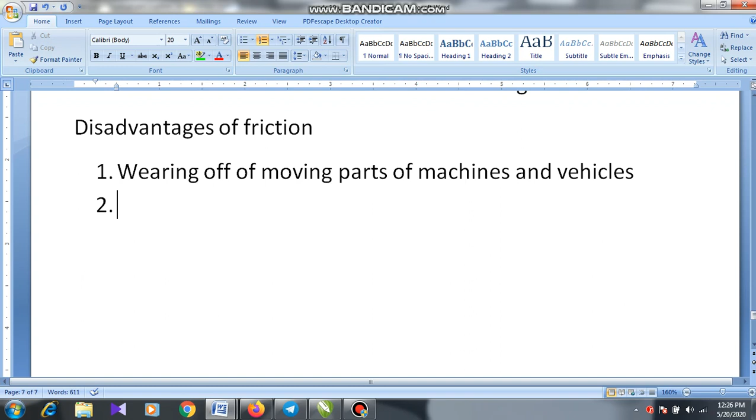Second, when there is friction occurring in a machine, it will consume more energy than when there is less friction. For example, in a motorcycle there is a chain. If you oil it, it will have less friction; if you don't oil it, it will have more friction. In that case, when you drive that bike, you have to spend more petrol. So wearing off is one side and energy wastage is another.

Energy wastage will also create economical losses. At the same time, during friction, heat will be generated, and that heat can damage the machine. That's another problem. Sound will also be generated, lots of sound. You have seen in some places when vehicles make brakes, it creates a bigger sound. Why? Greater friction. So sound generation creates disturbances. So, wearing off of moving parts, energy wastage, heat generation that can damage the machine, and sound generation that creates disturbances - these make a person think about how to reduce friction.

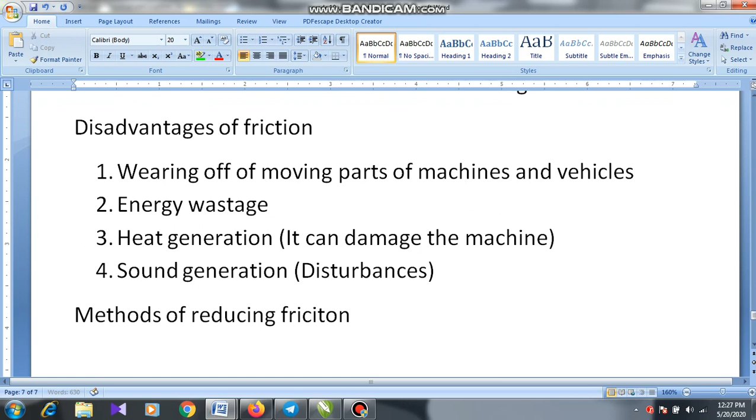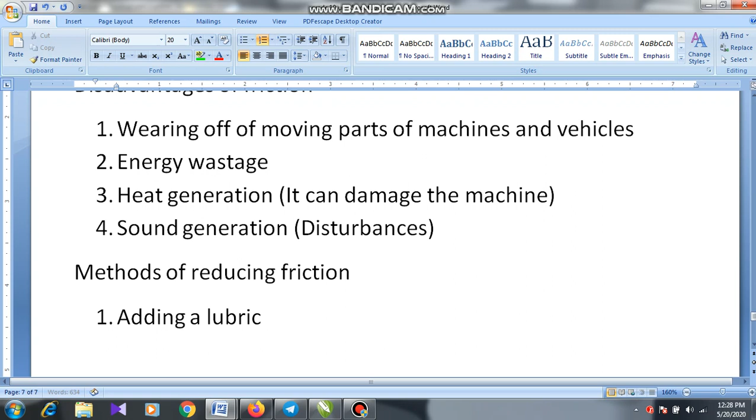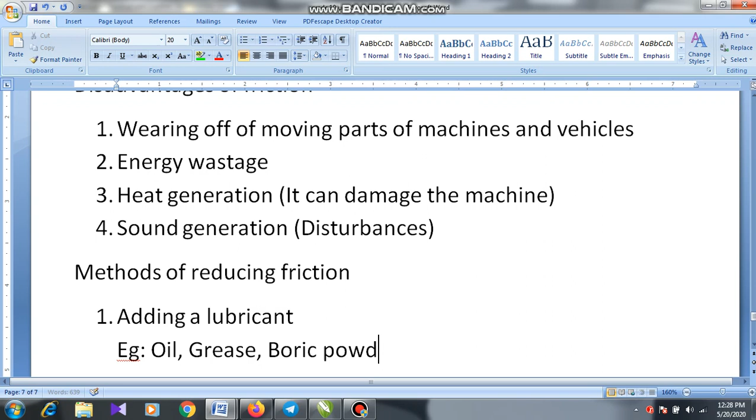Is high friction only causing these problems? No. So, methods of reducing friction. One method is adding a lubricant. What can be used as lubricants? You can use oil as a lubricant, you can use grease as a lubricant. You can use boric powder - boric powder is used in carom boards as a lubricant. You can use graphite powder as a lubricant too. It depends on the place - you can't put graphite powder on a carom board, it won't stay long, and you can't put boric powder on a bicycle chain. So depending on the place, we decide what kind of lubricant is used.

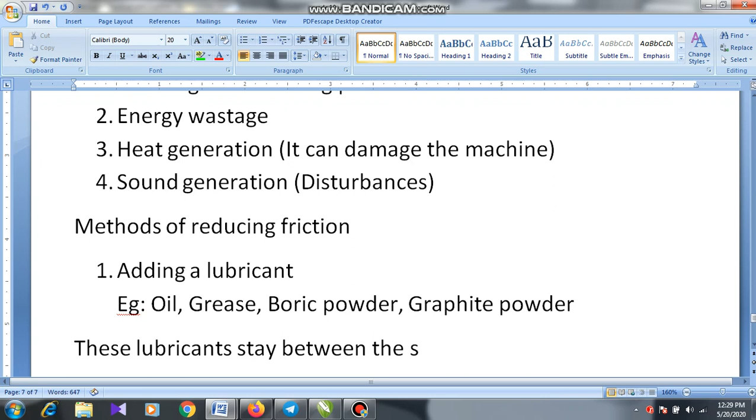These lubricants stay between the surfaces and reduce the friction. That is one method.

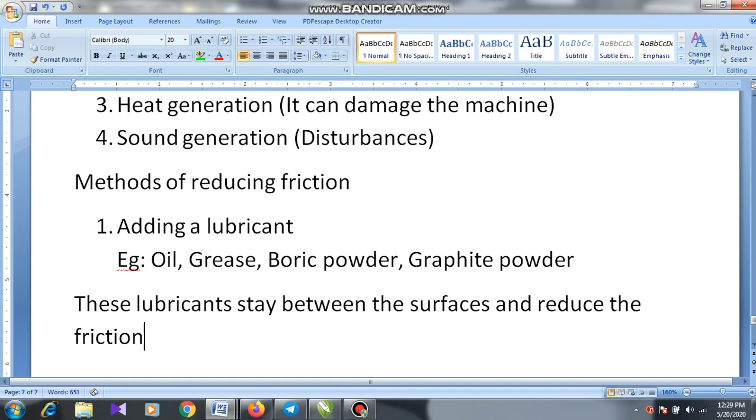The second method is using bearings. If you take these bearings, I'll show you. In normal words, mechanics used to call them 'race', but it is called bearing.

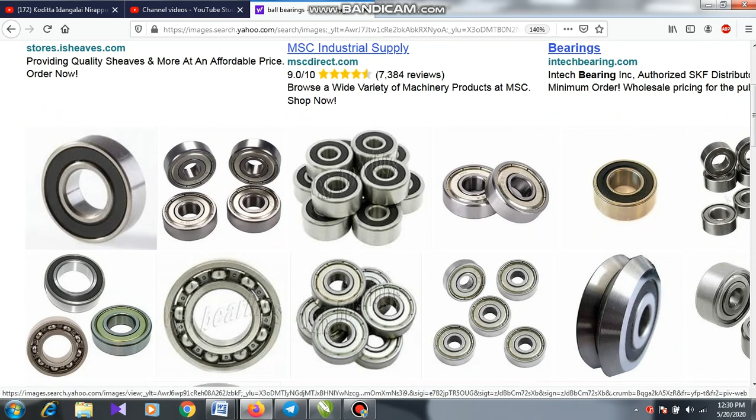Bearings are of two types. One is ball bearings. If you take this, this is the ball bearing - sometimes it has a cover. The balls are inside, and the cover prevents the balls from going out. So draw this diagram: an outer wheel and an inner wheel, and between the two wheels there are balls, so it can rotate easily using the ball bearing. If you take a fan, a grinder, or a washing machine, there's a motor rotating there - in those places they would have the ball bearing.

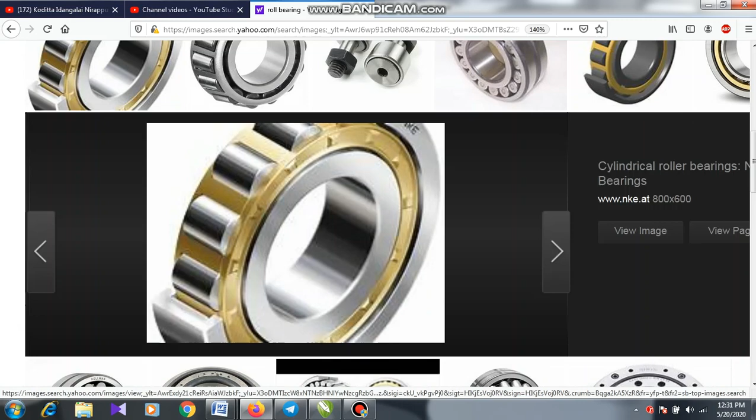There's another bearing called roll bearing. It's not very often we use roll bearing. It looks like a cylinder - there will be cylinders between the two surfaces. That is roll bearing, a bit bigger one. So the point is, using bearings you can reduce the friction. One is ball bearing, the other is roll bearing. Ball bearing has steel balls between the surfaces, and roll bearing has steel cylinders between the surfaces.

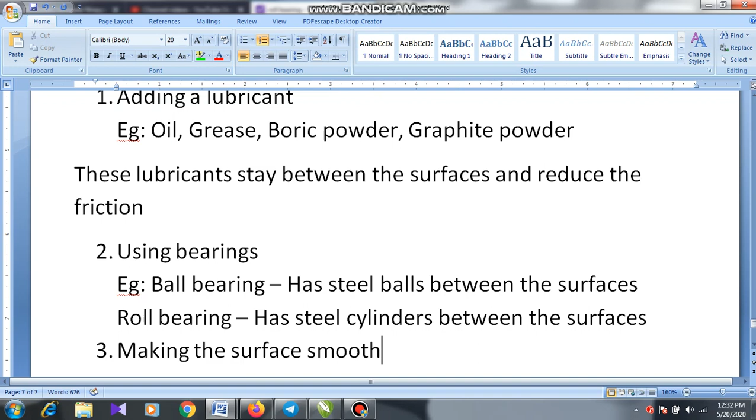The third method is making the surface smooth. For example, making the wall of the piston cylinder smooth - in vehicles there's a place called the piston. This piston cylinder is made smooth to reduce friction.